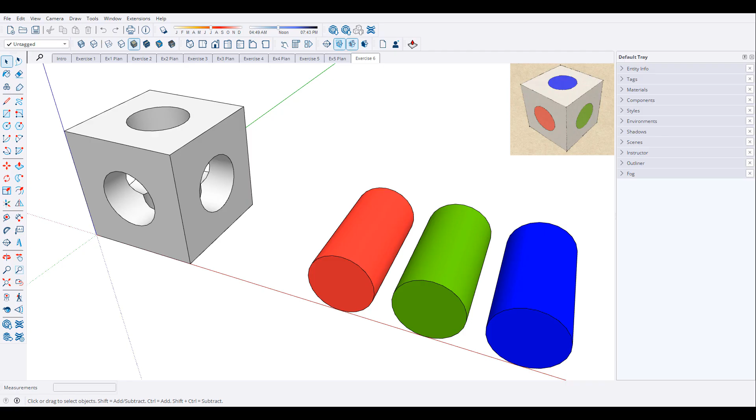Exercise 6 is a tricky one for the move exercise, and I thought having this video would be a little bit helpful. Plus, I've got a little tip that could help as well. One thing to remember about these shapes is that round shapes are made up of straight parts, so what you want to try and do is look and see where those straight parts are.

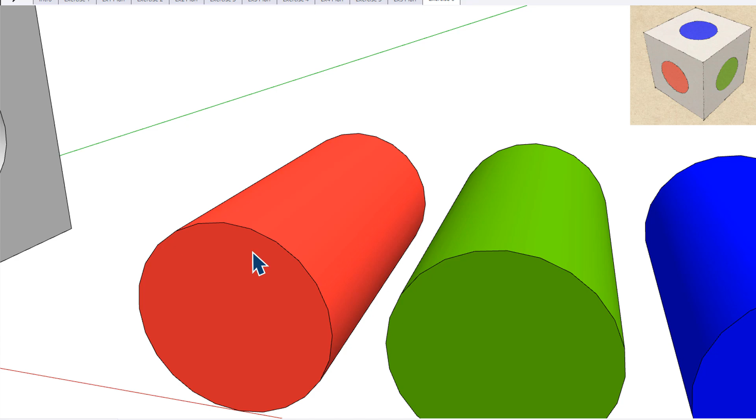If you select a shape, you can see that there are these little spots to grab from. So the easy one is this one. Select it, M for move, and I'm going to grab up in here. Notice that you can snap to midpoints and endpoints of these lines. Click, then zoom up to this side over here, and try and find the same spot. Click. That's a perfect fit.

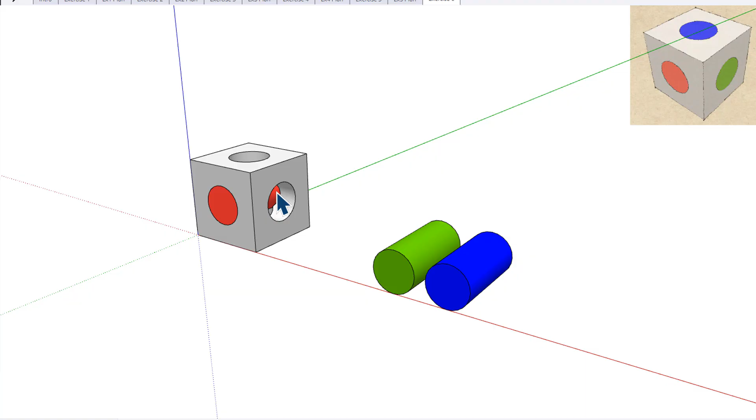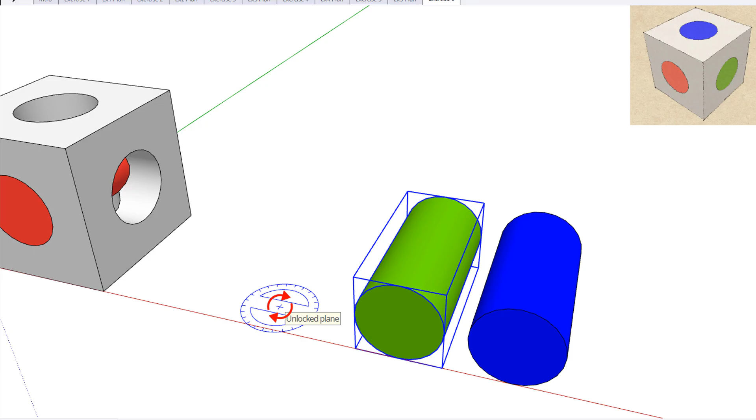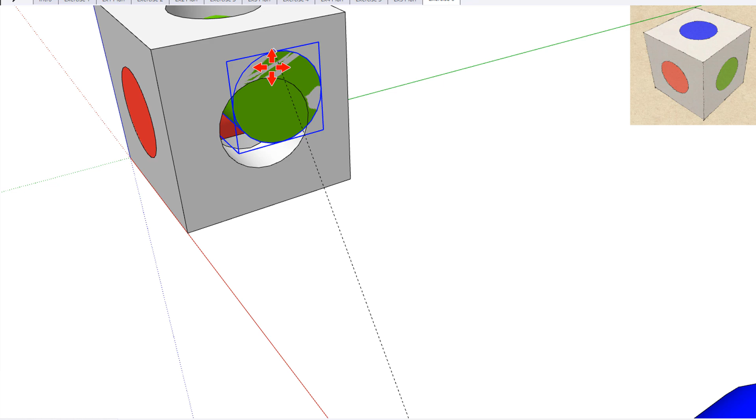These other ones get a little bit more tricky because you're going to have to rotate them. So I'm going to select this one and type Q for rotate. You can see that I can turn into different axes depending on where my tool is laying out. I want to rotate in the blue, so I'll hit the up arrow key to lock it. Find that spot, click, go first in the green axis, click, move it this direction, and just type in 90. I've let go of my mouse, I'm just typing 90, press enter, so now I know it's perfectly 90 degrees. M for move, click, zoom up tight, and find the same spot here, click.

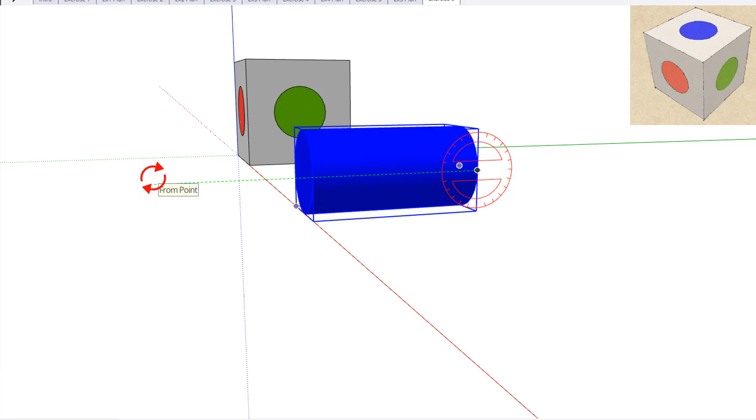This one we want to rotate as well, but this time in a different axis. So Q for rotate, and it's going to be in the red, so I'm going to hit the right arrow key. I click anywhere here, click, come across, again in the green, click, go up, let go of my mouse, type in 90, press enter, M for move.

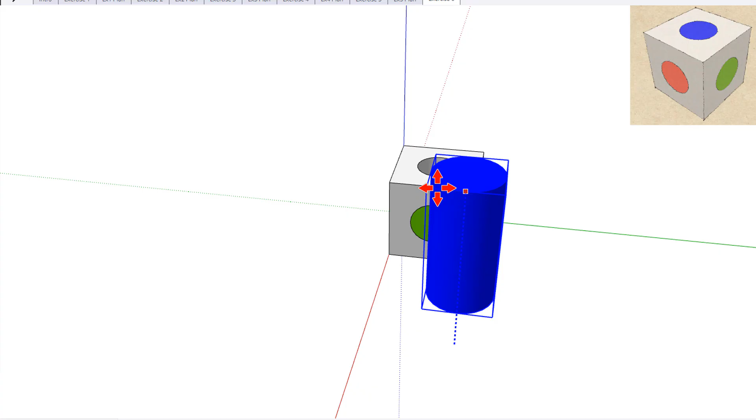And that's an endpoint there, click, and go over here. Now I'm having a little difficulty getting down, so what I'm going to do is hit the up arrow key and lock it. I'm still back over here. I'm going to lock it. Click on this corner so it's locked in this height, and go back here, click, and then go back.

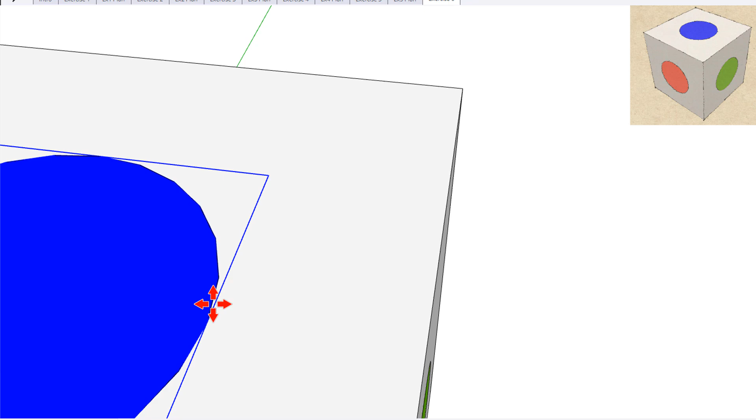Again, zoom in, and you have to find just the right one there. It looks like I got the midpoint that time of that line. Perfect.

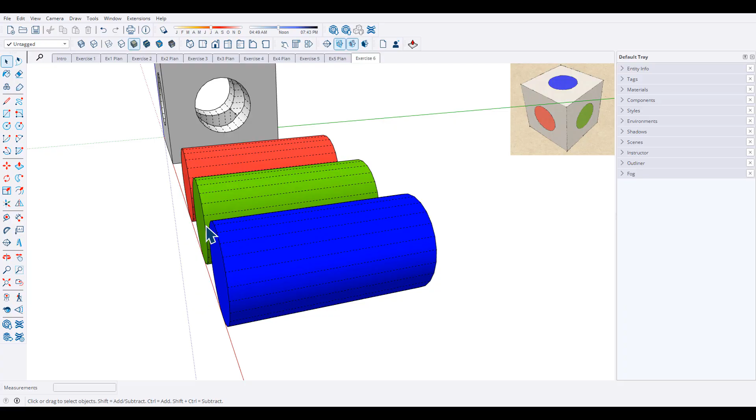One other thing that could be done, let's go ahead and undo this a second, back to where we were, square one, is to go to View, Hidden Geometry. Now we're seeing all those little lines, and you know exactly where the endpoints of all of them are. Another thing too is to maybe go monochrome mode, so that becomes obvious. Now you have to keep track of which is green, red, and blue, but you can go back to texture mode as well.

Hopefully these little tips will help with this particular one. It's tricky, but it's not impossible.